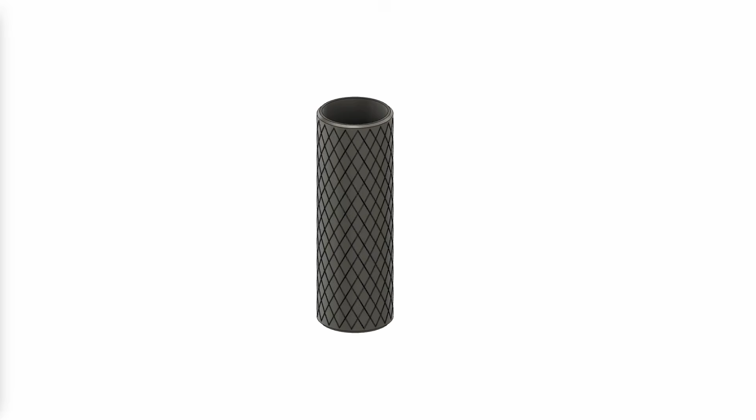Knurling textures don't just add a great grip, they also give your designs that clean, professional, industrial look. Today, I'm going to show you how to build a fully parametric knurled model from scratch. The best part? By simply tweaking a few parameters, you can instantly generate a pen holder of any size and control the knurl density on the fly. Okay, let's dive right in.

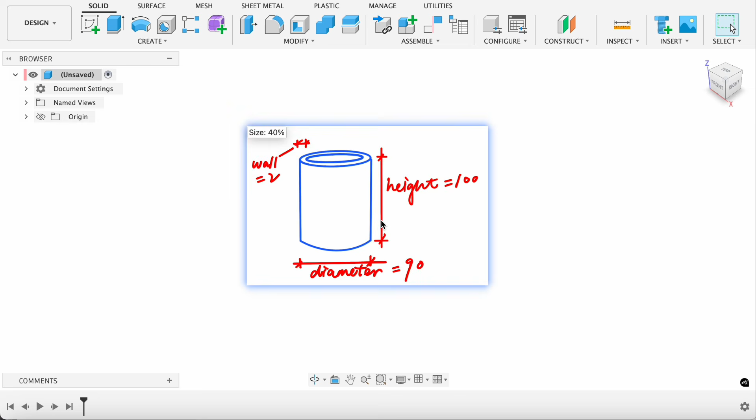First, let's look at our design and some key dimensions. We'll input these into the parameter table, which makes it super easy to adjust everything later. Go to the Modify panel and select Change Parameters. Click that plus icon to add our first one, diameter. Let's set the outer diameter to 90 millimeters. Next is height, 100 millimeters. And then wall thickness, we'll set to 2 millimeters.

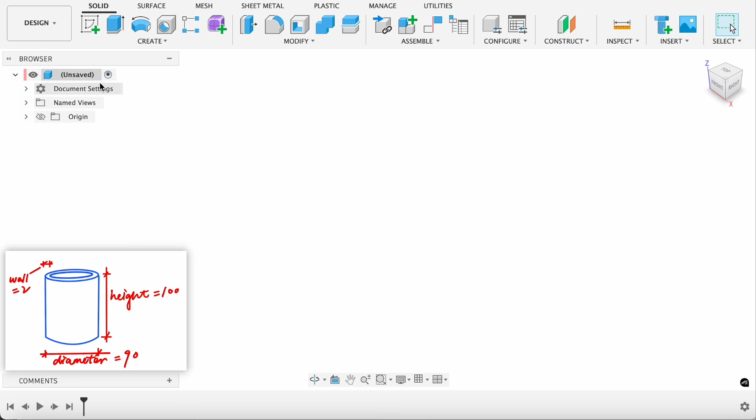Okay, perfect. Now, to keep things organized, right-click the root directory in the browser and create a new component. Let's rename this to pen holder. Click Create Sketch in the top left and pick the XY plane. Grab the circle tool, snap it to the origin, and just type in diameter for the dimension. That's the base of our holder. Looks good. Let's hit Finish Sketch.

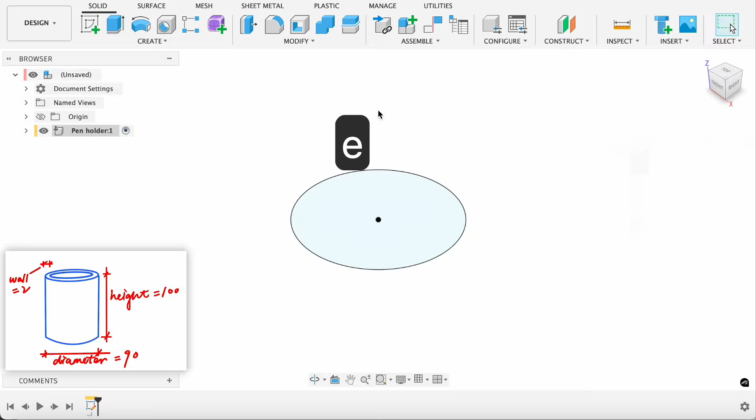Now, I'll hit the shortcut E for the extrude tool, select the circle, and enter height for the distance. And just like that, we have a solid cylinder. Head to the Modify menu, select Shell, click the top face, and type in wall for the thickness. Now we're getting somewhere. Next, grab the chamfer tool from the Modify menu.

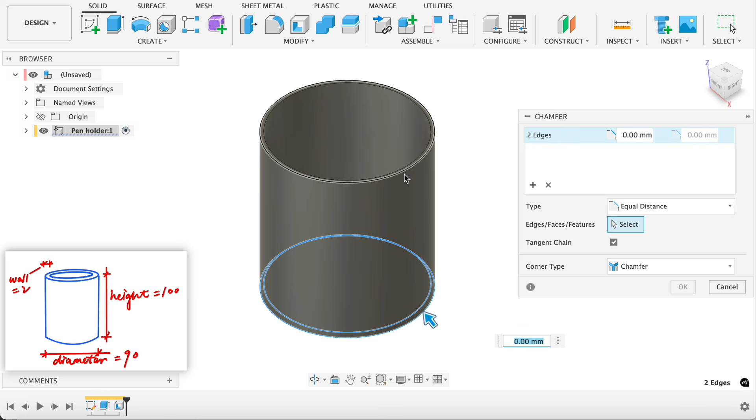We're going to select the bottom, outer, and inner edges, along with the top rim. Let's give it a 1 millimeter chamfer and hit OK. This doesn't just make the model look more refined, it also prevents elephant's foot when 3D printing. And there we go, we've nailed the basic modeling in just 4 simple steps.

Before we jump in, we need to define 2 more parameters. The first is knurl pitch. This controls the spacing between the lines, which basically determines the texture density. A smaller value means a finer look. In the parameter table, let's create knurl pitch and set it to 5 millimeters.

The second one is knurl number, which is the total count of knurling features around the circumference. Let's enter round(diameter * PI / knurl pitch). We're using the built-in pi constant and the round function here to make sure we always end up with a whole number. And don't forget to set the unit to no units. Since this is a count, it needs to be a pure number.

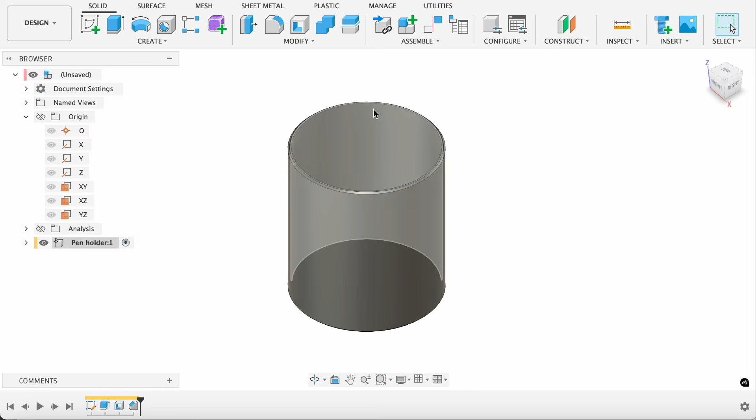Now, let's get that knurling started. Head to the Construct menu and select Offset Plane. Pick the bottom face and offset it upward by 2 millimeters. This is going to be our starting plane. I like to leave a small gap at the very bottom rather than starting the texture right from the edge. It just gives the final piece a much cleaner, more intentional look.

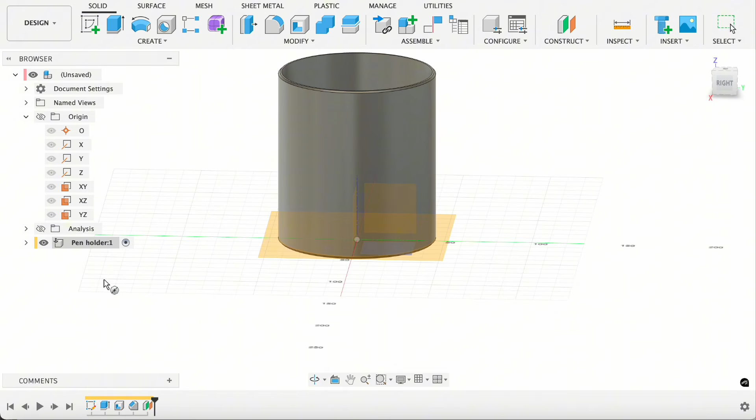Now, go to the Create menu and select the Coil tool. Pick the plane we just created, snap to the origin, and type in diameter. Over in the settings panel, set the height to negative height and subtract 2 millimeters gap at both the top and bottom. For revolutions, let's enter 0.5. You'll see exactly why when we use the mirror tool later.

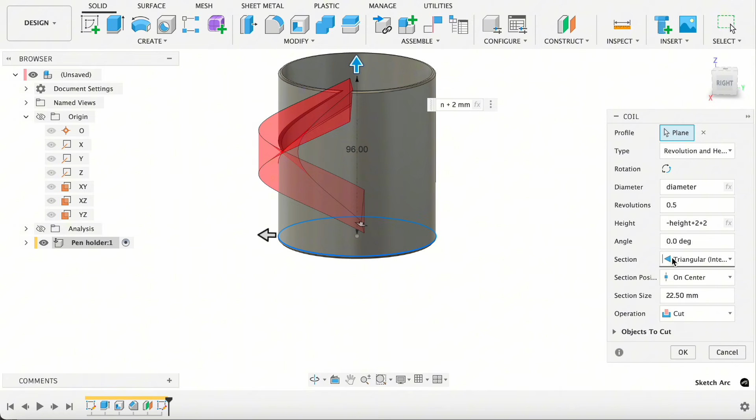Set the section to internal triangular since we need to cut a sharp V-shaped groove into the surface. Finally, set the section size to 1 millimeter and make sure the operation is set to cut. Perfect, hit OK.

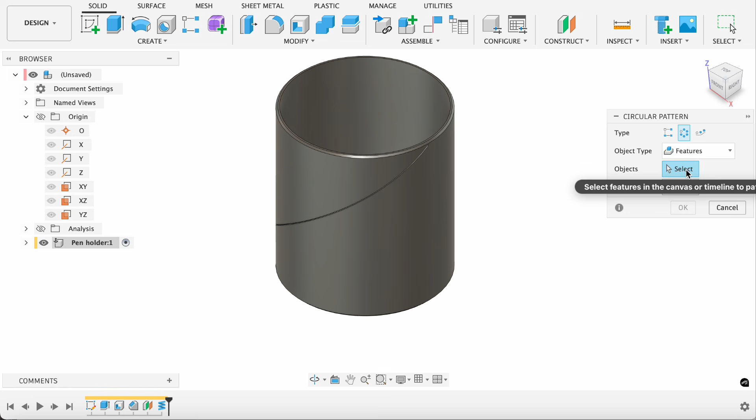Now, let's wrap this operation around the entire circumference. Head to the Create menu, go to Pattern, and select Circular Pattern. In the settings, make sure to set the object type to Features, then click the coil icon in the timeline at the bottom. For the axis, just select the bottom outer edge of the cylinder, and for quantity, enter knurl number. For the compute type, go with identical.

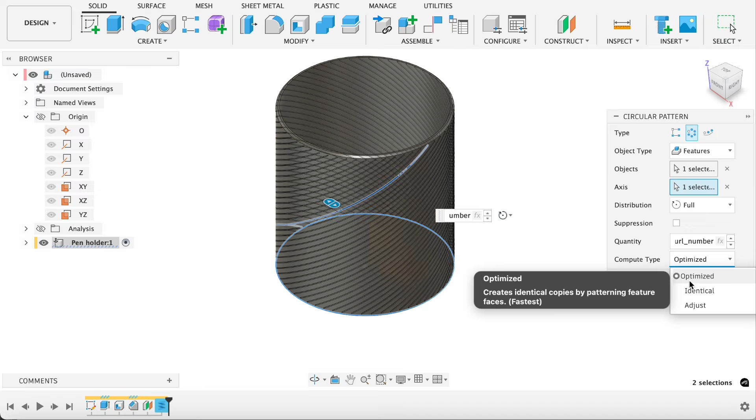While optimized is the fastest, it can glitch on complex surfaces. On the other hand, adjust is precise but very slow because it recalculates every intersection. We'll choose identical since it's fast and stable for a standard cylinder like this.

Now, the final step. Head to the Create panel and select Mirror. Keep the object type as Features and grab both the coil and the circular pattern from your timeline. For the mirror plane, go to the origin folder and pick the XZ plane. Actually, the YZ plane works just as well. Hit OK, and there it is, a perfect parametric knurling.

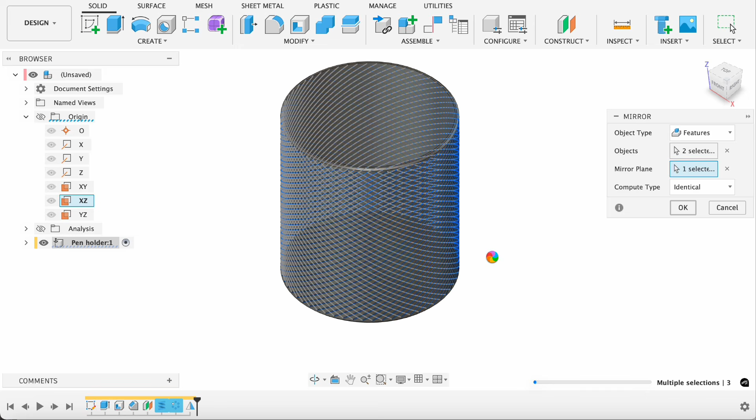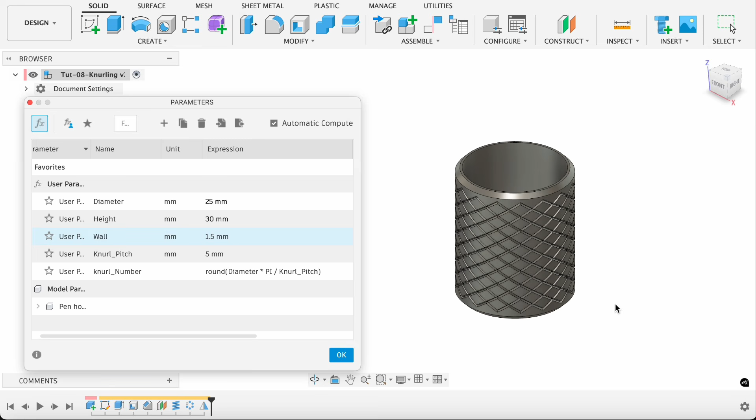To get a fast print, I'm jumping back into the parameter table. Let's shrink the dimensions and the wall thickness, but keep the knurling size exactly the same. There we go. You can see the holder scaling down, while the knurl texture keeps its original size. This is definitely one of those I love parametric design moments.

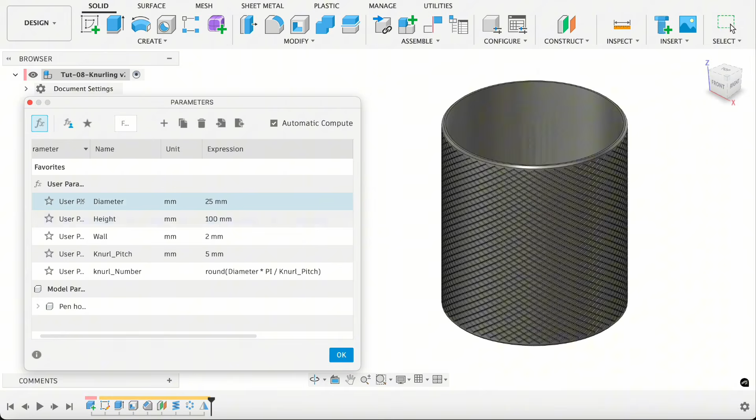Okay, send to print. Now, let's check out the final results. I'm really happy with this texture. It's clean and precise. Compared to a smooth surface, this has a much more premium feel and provides extra grip. I mean, not that you really need a high-performance non-slip pen holder, but hey, why not?